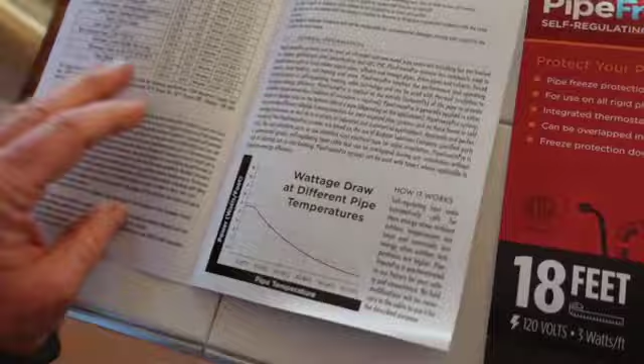We embark on a new endeavor, the PipeFreeze Pro Radiant Solutions. We're going to test this and install it. I've read through the book. It looks like it's going to help with freezing, wherever you've got water pipes that freeze.

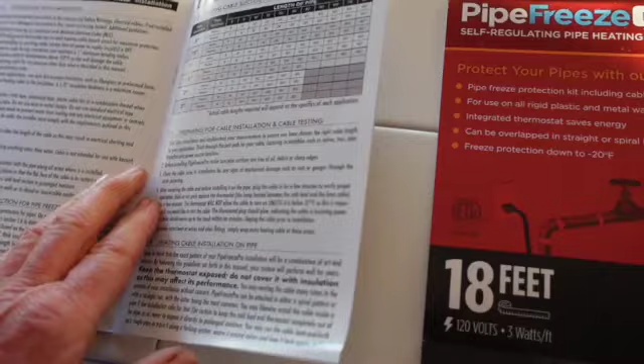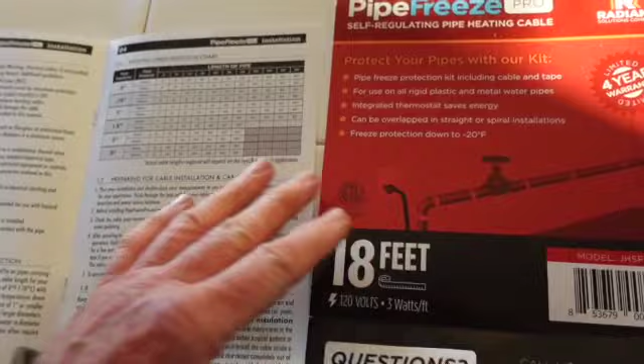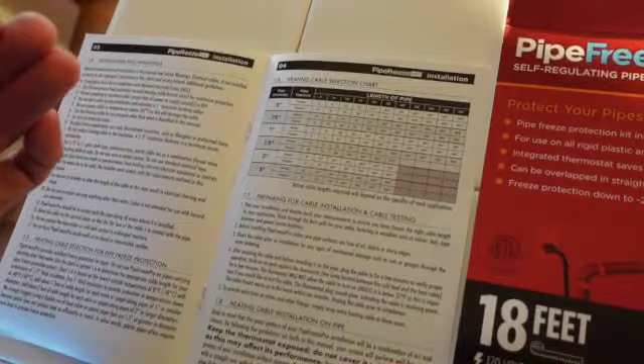I'm going to install this in two places: one at my wellhead, and one at a condensate drain at another house where it froze up and went into the pan. I've experienced this myself - I had an RO system, a reverse osmosis system, in the house, and the idiot plumber ran the drain just outside, not only uphill so the water drained back in the house, but when it froze, it backed up in the house and flooded it.

It didn't have a safety cutoff. That's another thing you should think of, if you have a place like upstairs where you've got a pan and the condensate line. The condensate line froze, and this is a big neighborhood full of these things, and there's been all kinds of problems - flooding in laundry rooms and other things like that.

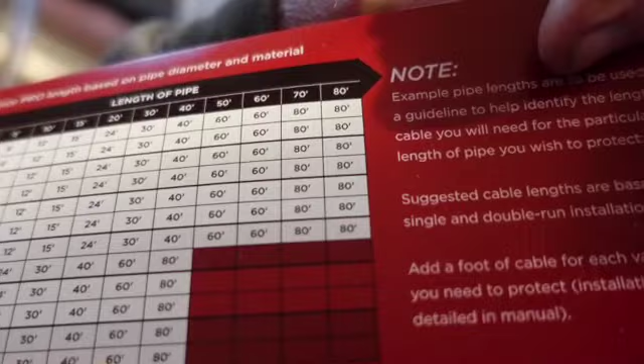So this could be your answer, and these are available - not a sponsor, by the way - in up to 80-foot lengths. Wow.

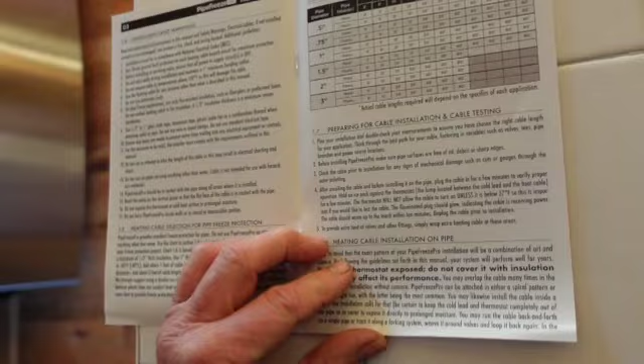Well, there, you can see that. You can figure it out for yourself. So this has been interesting reading, and it seems to be a rather flexible, usable type thing.

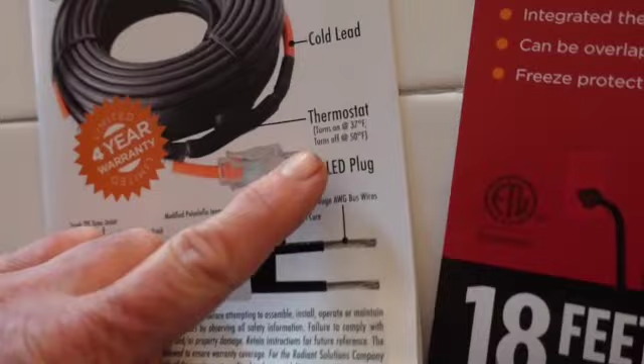So we're going to plug this in, and I'm going to get a bag of ice and do like it says, test it. So it's supposed to work down to -20. It comes on at 37 degrees Fahrenheit and turns off at 50 degrees Fahrenheit. So this takes away the having to wire a switch and walk down there and do all kinds of stuff.

And I did check the output on this - mine's an 18, so it's 120 volts, 3 watts. That's not going to be an issue. I'm going to be tapping it off my wellhead, and the wires I ran from the house down there are real good quality stuff, so I'm not afraid of putting some strain on it.

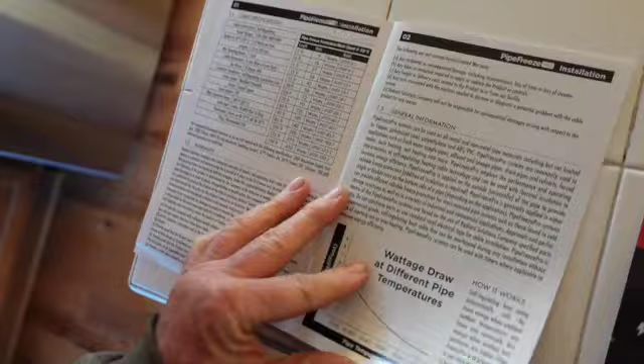So we're going to go through this. We'll do - there's your chart there - 18 feet, 6 feet, 18, whatever.

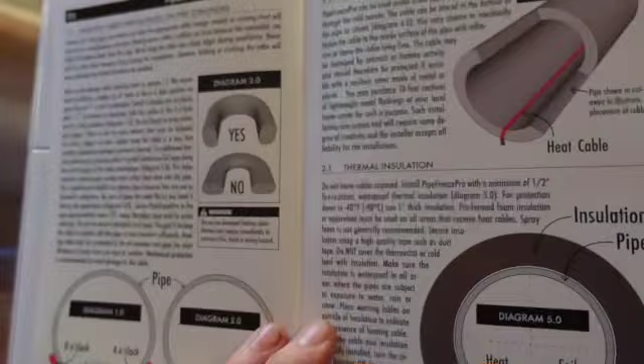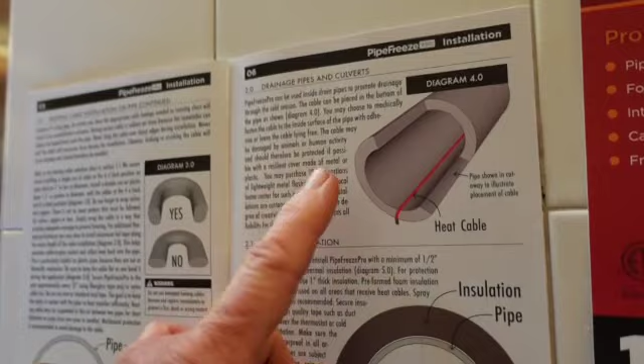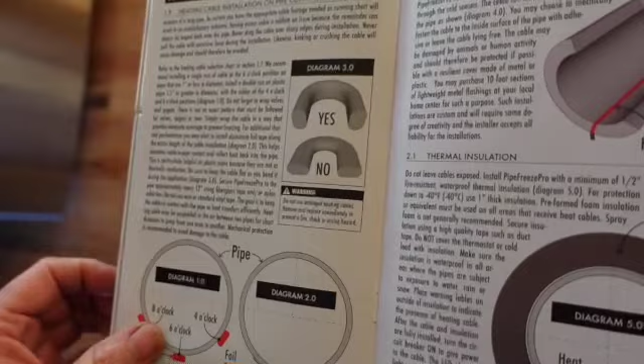It's very, very good, and it says you can actually put it down drainage pipes and culverts, but you don't want to immerse it in water too much. This could be important on a condensate pipe that you can't get to, if it's going down the side of a house. You could run this stuff down in the pipe, but I don't know how well that would help from freezing at one point. My hope is the warmer water will keep it from freezing, but I can't count on that.

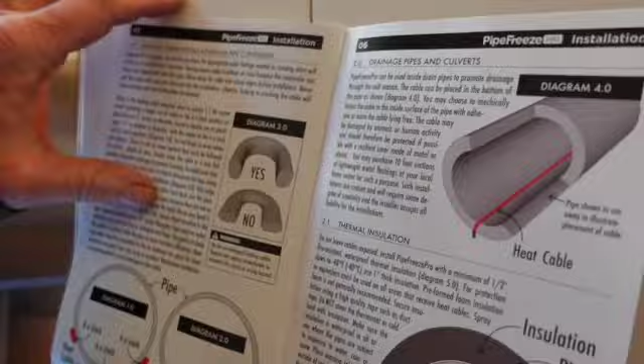So where's the thing about testing it? Testing 1, 2, 3.

So uncoil the cable, hold the ice pack on the big lump right here, and I got my FLIR ready to go, and I also got this to wrap it with - this is a little bit higher temperature tape. I'm going to use this in a couple of different places, but I think you could just use foil tape and insulation. It says you can, so I would say that's okay.

So let's get an ice pack going, plug this in, and it says in 10 minutes we ought to be picking up temperature here. So we'll plug it in, and the LED light should light up, and it does.

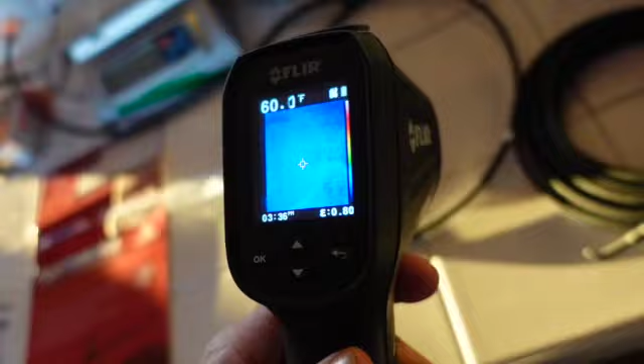Any opportunity to use the FLIR, huh? So let's see what we got here with the FLIR. Okay, so my house is very cold - it's 60 degrees - and you can see there's the line, and it's the same temperature as the house.

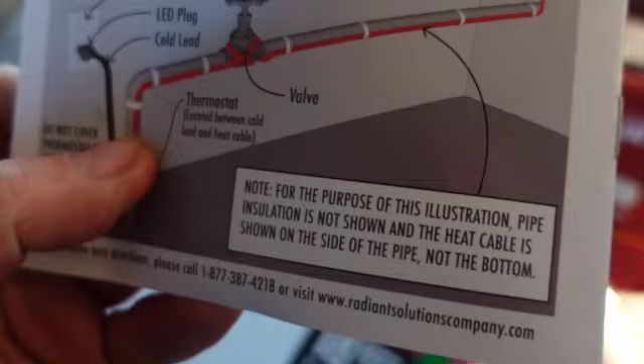So let's get an ice pack going and see what happens. Curiosity. This kit also comes with this fiber tape - that's pretty nice. So when you're going down the line, you can see how those things work. Very interesting stuff, I'm looking forward to seeing this. I did not know this existed until the other day.

So there's my little cloth, and here's my bag of ice, and we're going to place it right there over that sensor. Let's get a little air on that. Okay, but make sure it's close so it don't leak water all over your counter. Okay, we'll see, I got my timer set. We'll come back and see if this is heated up. It's not going to hurt my countertop because it's ceramic tile. Okay, 10 minutes.

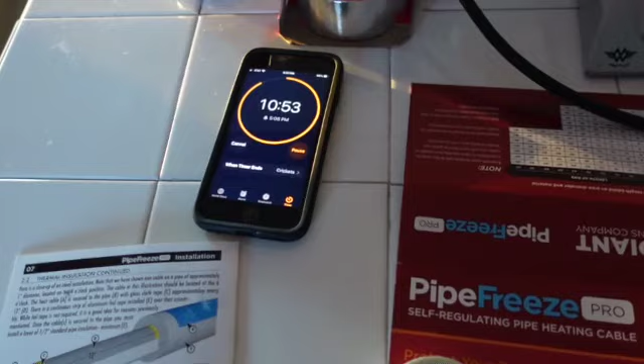Okay, it's been 11 minutes. It's been over here acting like it's alive. I can tell you that feels good, especially in this house.

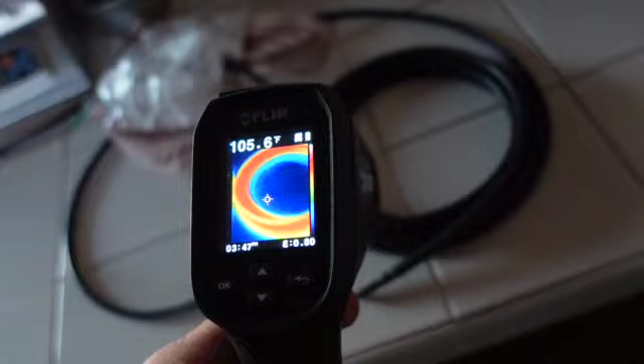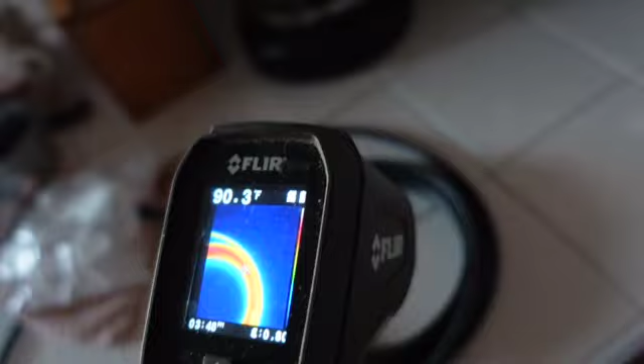So let's start here. So that's 105 degrees. Oh, I can already tell. Whoa, 114 degrees. So that's working. That makes me feel good because that makes me think the water going down the pipe would be warm enough to probably look at it. See, it's alive, it'll move. Now I'm very happy with that.

Okay, another excuse. I just love using the old FLIR, a window into the universe. Now this stuff definitely has an up and a down and a back and a forth, and it says whatever you do, don't bend it this way, go with the flow. So, boy, that feels nice. Ooh, digging that. Okay, well, let's mark that as tested and passed.

I hope I've got everything. I got a whole bucket full of joy there. There's our target down there, the old wellhead.

Collect up these extension cords. I'm going to check the current and see which ones are hot. Pretty obvious. Yep, it was cold. I had to do something.

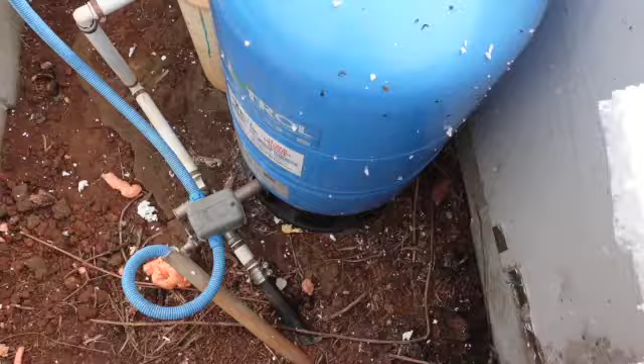Here we are, we have gained entry, as it were. We have the square D box that you will also find on air compressors. And we have found our target, which is that white pipe there to wrap. I believe 8 feet's going to be plenty.

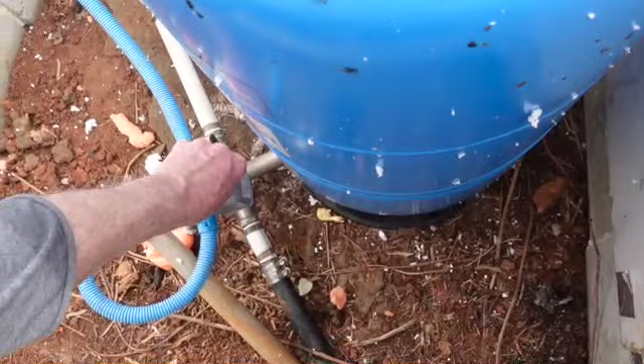So all I got to do now is get down in there and take this off, and see how I'm going to tap me an outlet in the thing. Well, there we go.

Let me see, well, black and red's going to be hot. Let's get the meter on that. Meter, one thing at a time, sweet Jesus.

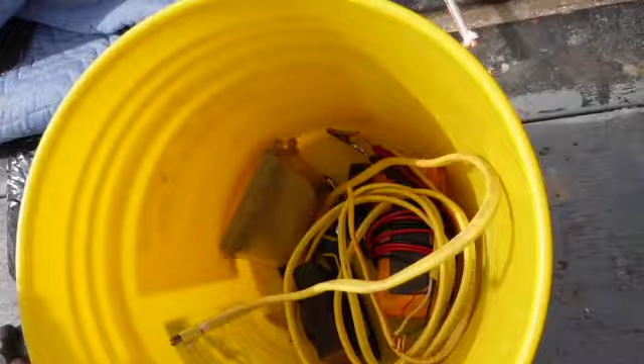I'm going to put the outlet in this box. I might as well take it over there. It's just an extra crummy old box there. And

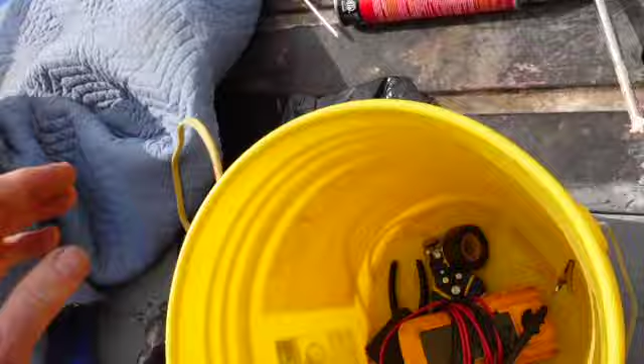Let's see, there's my other stuff over there. And let's get the meters first. I think I'm just going to need a little tiny short piece of Romex. Okay, let's—luckily I didn't build this so high I can't just step in there. I can do it from here though.

Let's see which one's hot. I'll tell you what they are in a minute. Let me get this thing set to that kind of voltage. This is why the only electrician I trust is me.

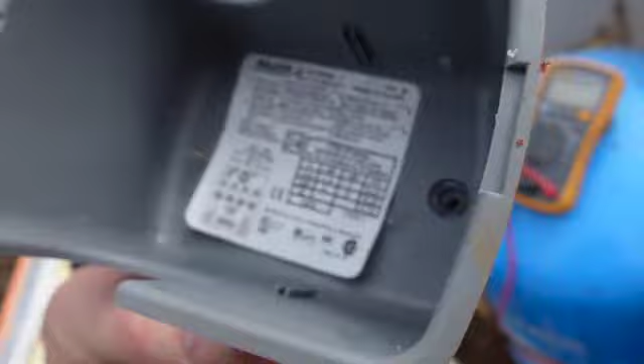It's not wired up wrong, it's just the line wires should be on the outside according to the inside of the Pumptrol. See, it says L1, L2 on the outers. The well guys didn't wire it that way, but it really makes no difference.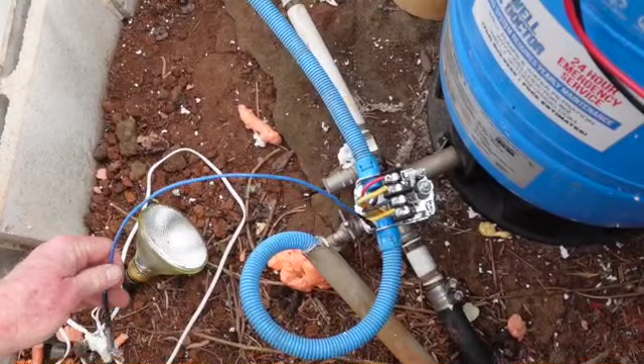So I've got a test lead going from the plug to the base. And remember, the smaller one is on the plug, it's generally the hot one. So it looks to me like there's my test light going off. The two yellows are hot. Okay, so I can go off like either one of those.

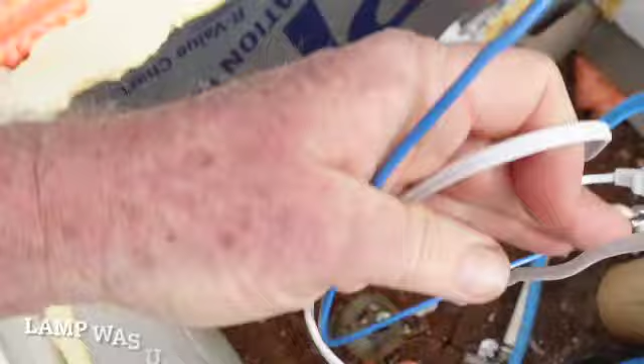Groovy, let's get all that out of there before it bites me. I don't want to get bitten by electricity today, so let's go put the—that worked out pretty handy having a test light down here.

I got to get rid of this thing because it's cracked, and that's just plain dangerous. But I think I didn't have any water, so you got to kind of forget protocols when it freezes. So, okay,

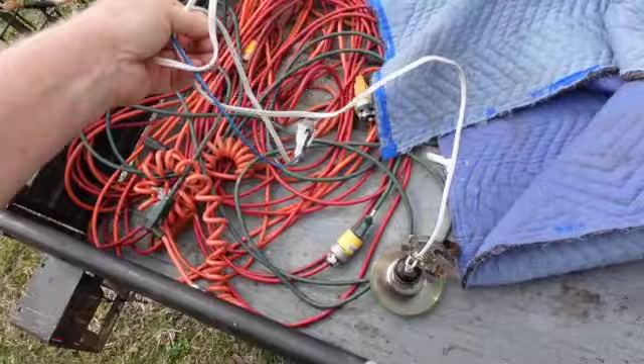Let's go turn the breaker off. Leave the meter down here so I can check it, make sure it's off. Let's go back into the newly painted room here.

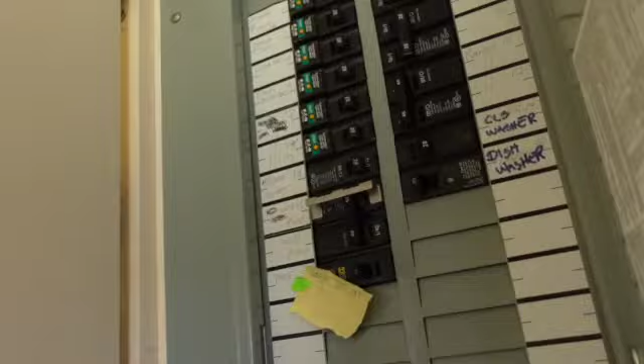And well pump is right here. Okay, so let's go in there and check her. Make sure she's off and do a little quick wiring and some taping, and this will be done. I can write this off my list.

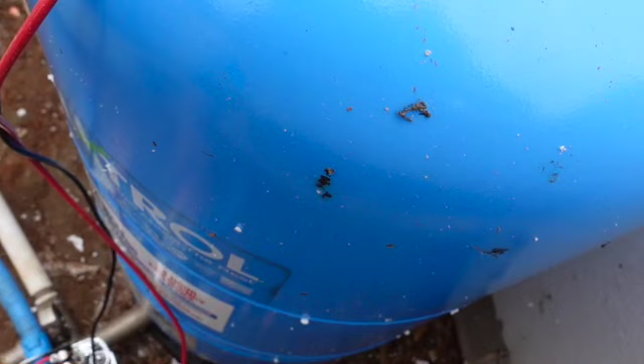Always just check it to make sure. And we're going to use—this is kind of for automotive more than this stuff, but she's at 0 residual.

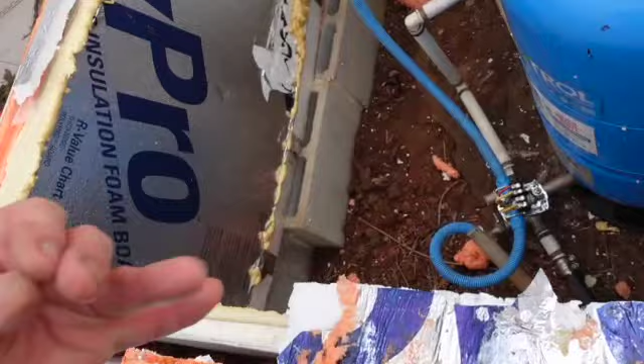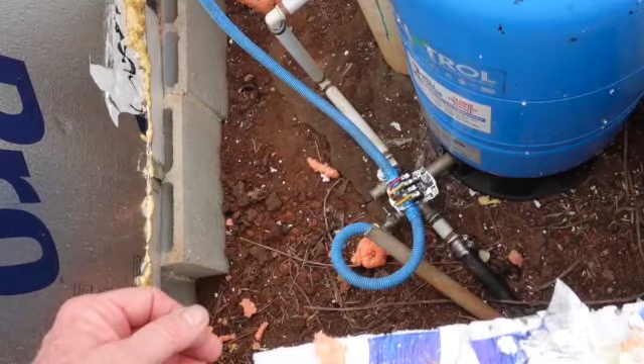Now you can pretty much be assured that the two wires—well, you'll have 3 or 4 wires coming down from the house, two neutrals and 2 hots. And so I know that yellow wire goes to the house because I'm the one that trenched it. I did it, so I kind of knew those were hot, but there's nothing like making sure, because if you see red and black, you think, well, those are hot. Nope, those are the lines going to the pump way down in the well. Well, not way—this is a 200-foot well developing 20 gallons per minute. So she's the killer well, is what they call it.

So let's wire this thing up and call this a day, okay? And we'll get down in there and wrap this thing up. But I'm going to wire it from up here, I don't want to keep stepping over this thing.

This tool has proven itself over and over. Let me get it back in there. I really love this tool. It takes 2 hands though. But that's a good tool, not a sponsor. Never had a sponsor. Almost had a sponsor one time, but they went away.

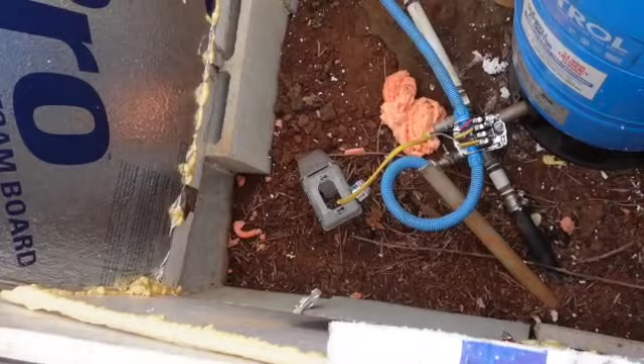Okay, we're wired in, and we're going to go up there and turn the power on and plug this heater in and see if it works. Gosh, I wish I had something to tie that down, that outlet in, but I don't. I guess I could get some pull ties or something. But I don't know, I think I'm just going to let it kind of float on out there. Don't know what else to do. So let's go check this thing out and see if it works.

Now the sides of that outlet are going to be hot, so let's go flip her back on again now that I got her wired. I believe they call this getting your steps in. Well, I'm going to have to walk 3 miles. Let's see if it kicks back. Nope, didn't kick back. Let's go plug it in, see if the little light comes on. And then we'll tape her down, close her up, and get out of there.

I don't like being around that part of the world because there's a bunch of mice down there, and they scurry about.

So like we saw before, this should give us a little light when I plug it in. Need both hands for that. So y'all take a look at the beautiful sky. I test this thing and try not to get popped.

Okay. So there it is. There's the little light on in there. So let's close all this up and get this thing going here, get it out of the muck.

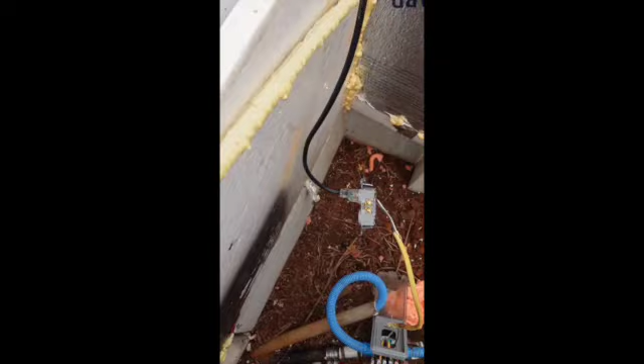So it's way above 37, so I won't have to worry about it. I bet the mice are probably going to like this. Let's not get tangled up on that, because that's the hot side, the gold side's the hot side. So let's get all this closed up. I cut a little notch here for the wire, and I cut the notch out in the box for the wire to come out. So let's close all this up and wrap it up.

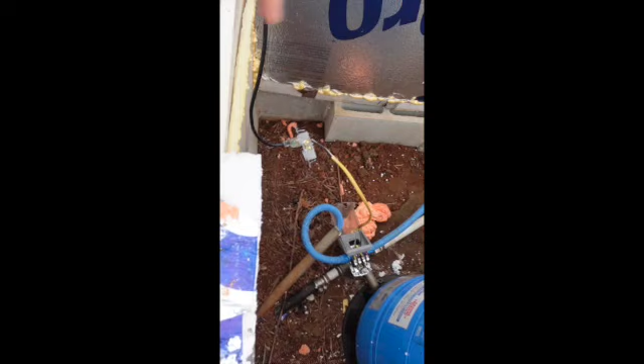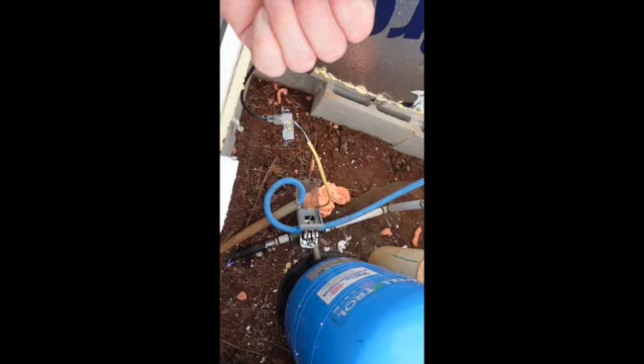Okay, so I've got that, that's some strong stuff there. I got that coming up out of the box. The box, I just taped it to this. Let it float in space. I can still see the orange light is on. Yeah, I can see it. I don't know if you can. That's good. So I just taped it there, started here.

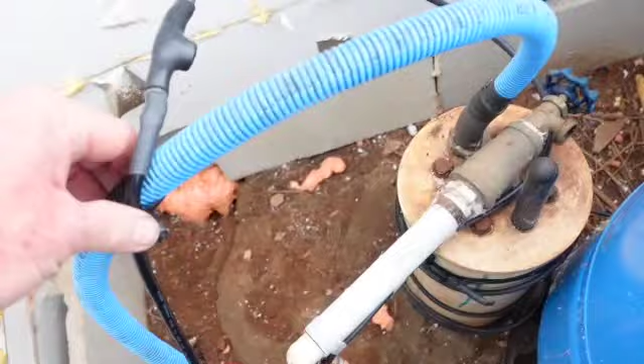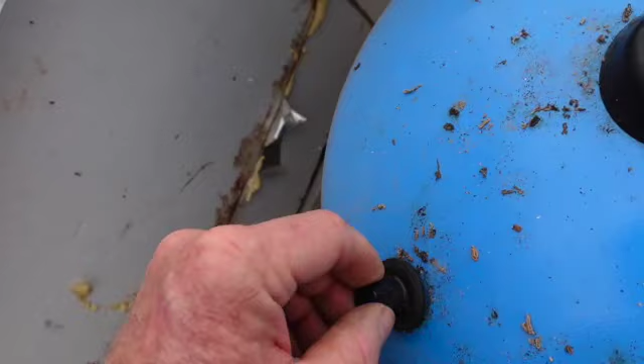Here's your thermostat, so I got it sort of out here on the high part in space. And I went down the line and around the blue tank, pressure tank. And then here you'll find a little Schrader valve. If your water starts spitting at you, come out here and hit on that thing. If water comes out, you got a bad blue tank, diaphragm's busted.

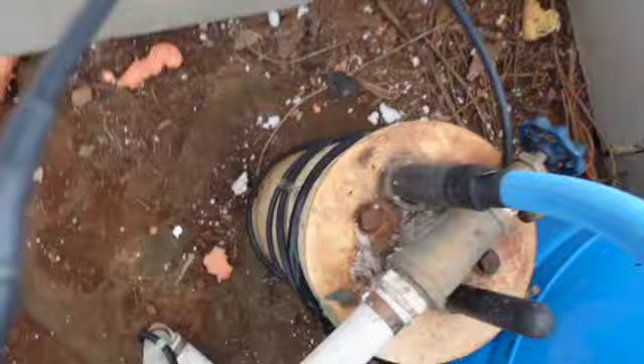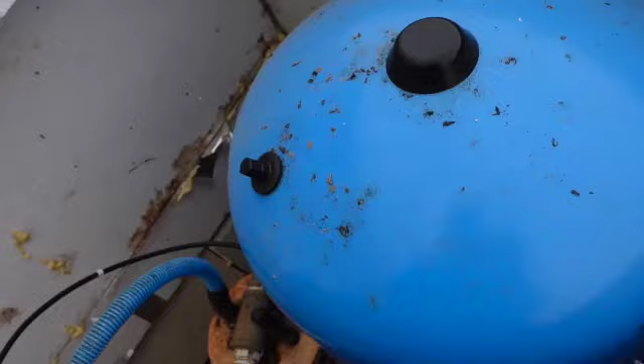And I just wrapped it around. I had a couple of feet remaining, and I just wrapped it around the head of the well, just to kind of keep it warm too. Heat rises up, coming right in at the faucet. Looks good to me. And I got this fancy tape here. We're going to use that, and we're going to just sort of wrap this up, and then we'll close this out.

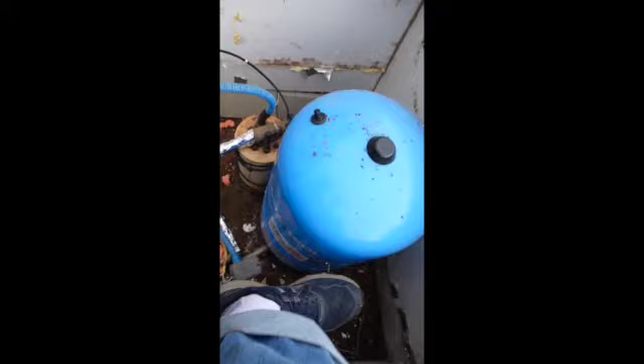Okay, she's fully wrapped, and I can get out of here, which I want to do very badly. You don't need to see me close it all up and everything, but that's the way to do it. I guess if I were you, I would measure, but I like the idea of wrapping around the head like that. That makes me feel a little better, and that'll just generate more heat in here too.

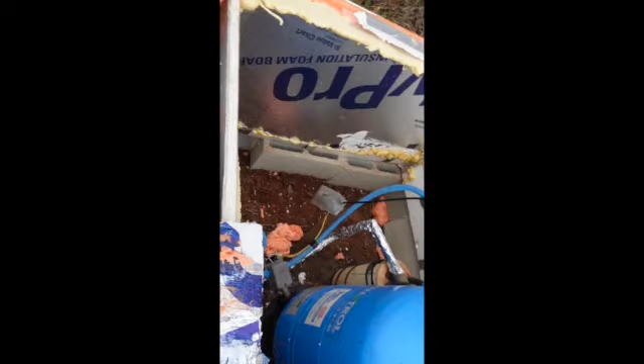So let me seal all this back up, and we'll call this one quits, and we'll pick up our mess here so we won't leave it down here. And there you go, and that's a fully done thing.